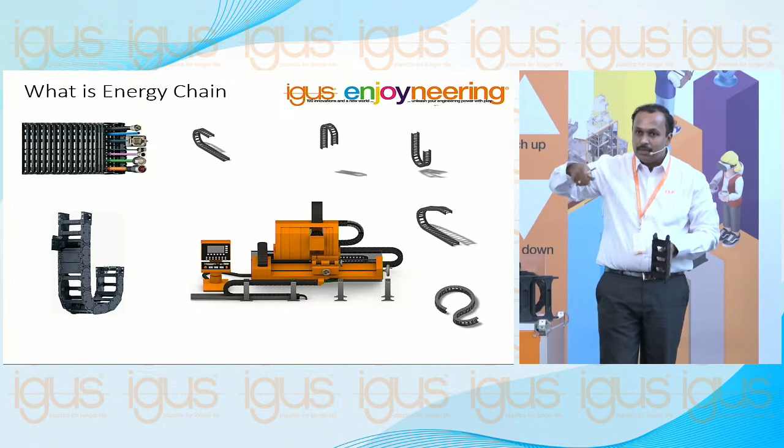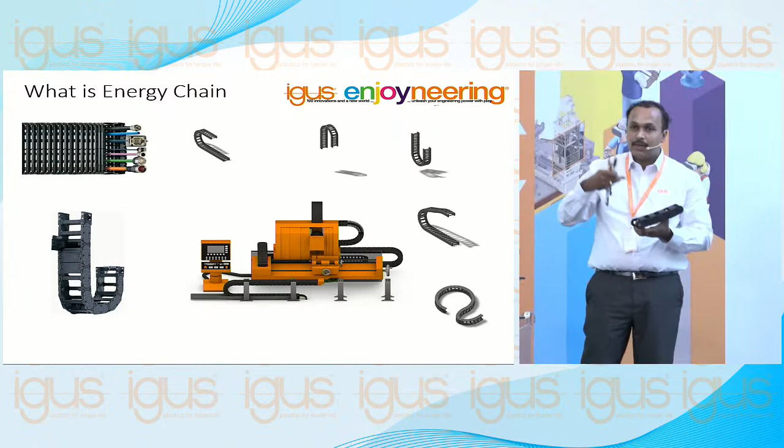Energy chains are also called drag chains. These are used for protection of the cables which pass through the energy chain system. These are the cables which will be inside the machine. As Deepak explained, in cranes the cables hang in a festoon system. We can replace this and use the drag chain system, and the cables will be passed through this, which protects the cables and gives longer life for the cranes, as well as increasing machine durability and performance.

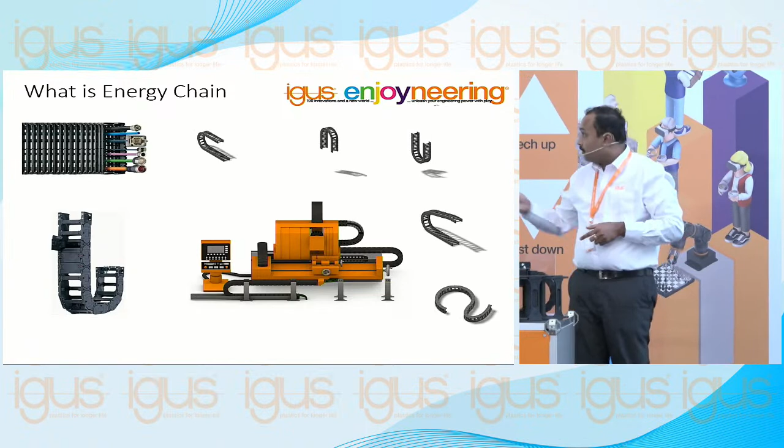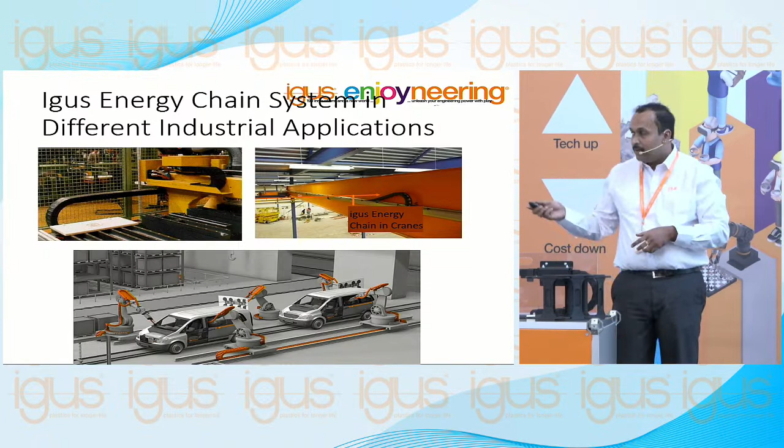And these are the different motions of drag chains, what you can see here. And these are the different industries where the drag chains or energy chains are used: automotive industry, cranes, machine tool industry, woodworking industries, and many more applications.

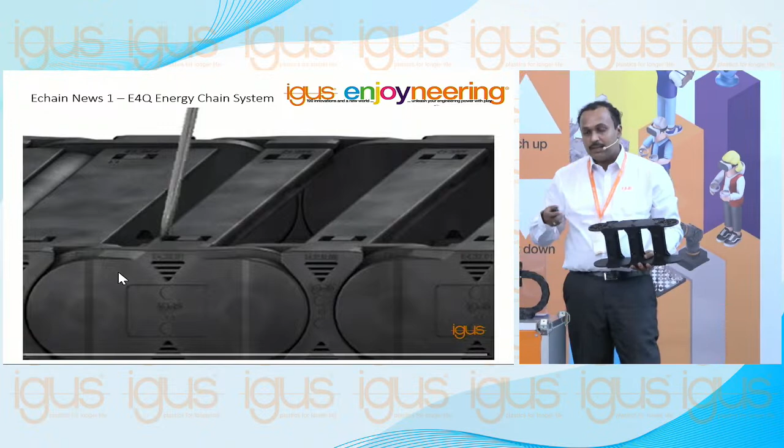Moving on to the news, the first product is the E4Q. We have had this 4-piece concept design for the drag chains for the past 20 years, and we have been modifying and engineering it year on year by improving its performance. In earlier days, we used a screwdriver to open this crossbar, which we call the crossbar, to insert cables inside the drag chains. Now we have made a revolutionary design in this concept to reduce the assembly time for industries and companies where this took a longer time to open the crossbar. This is called the E4Q design.

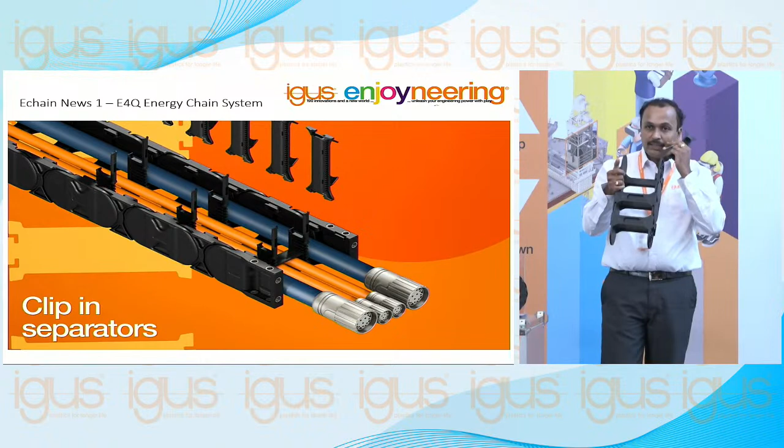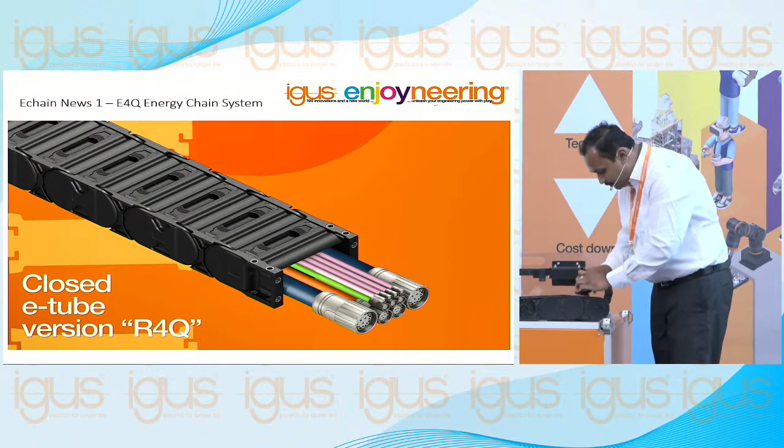In this, you don't need any screwdriver. You can just open this crossbar with your fingers, and it will come out easily. That doesn't mean it doesn't have strength — it's very reliable and has high strength as well. You can insert the cables much faster than using a screwdriver and then locking it back. Once the cables are laid inside, you just put the crossbar back like this, and then lock it. This way, it reduces assembly time, gives more time for factories to work on other things, and improves performance.

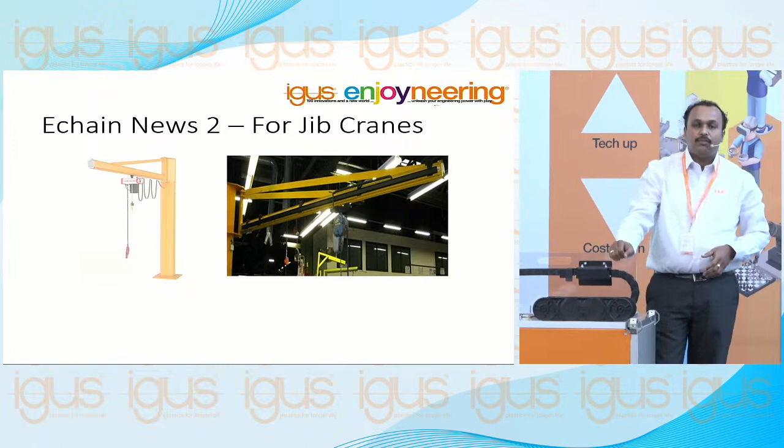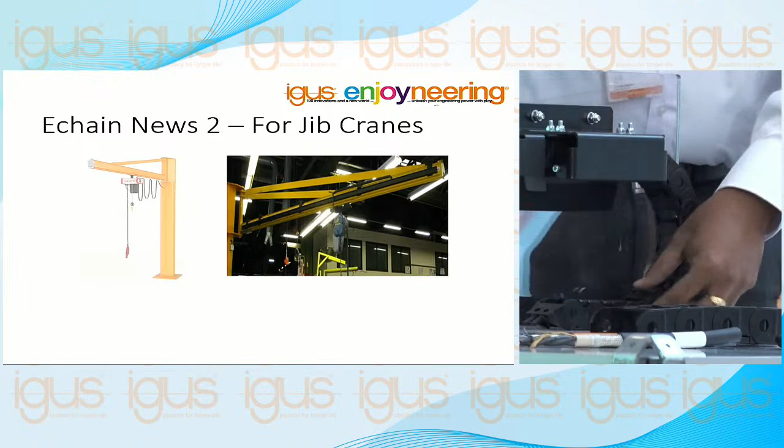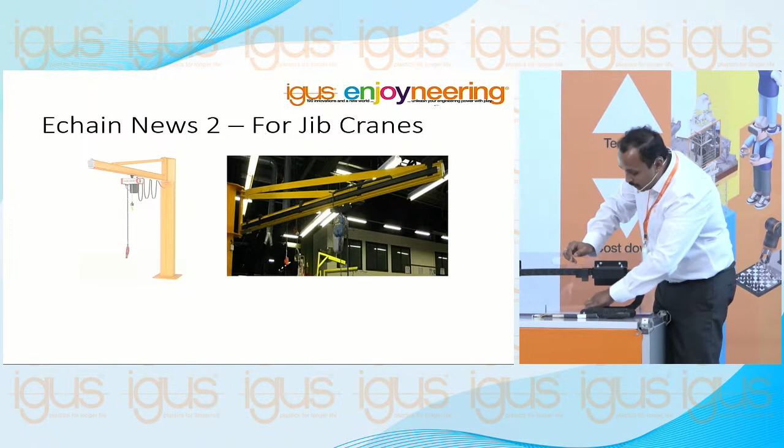Moving on to the next application, as Deepak said, in the crane industry we have been doing well, and we have supplied nearly 14,000 plus drag chain systems to the industry. We have supplied to many cranes like double girder and single girder cranes, and now we've introduced a new solution for jib cranes, which carry smaller loads like 2 ton, 3 ton, in small scale and automotive industries. Earlier, festoon was used for small travel applications. Now we've made a solution supporting the drag chain that can work up to 10-meter travel length without any support. This increases the performance of the jib crane and gives more life for customers at the site.

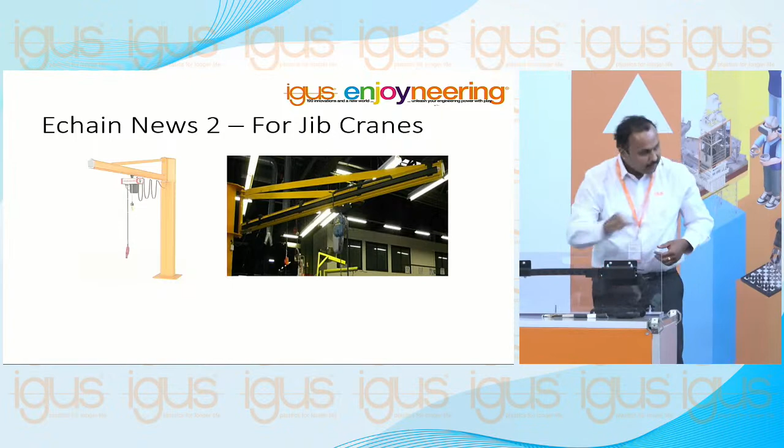Now you saw the energy chains, and they are used very extensively in machines. When we started with energy chains for moving applications, one thing we realized was that the cable is a very important part of this. So we also have high flexible cables that can last really long. I would like to now call upon Ravi Alloli, who is our product manager for cables, to introduce the news for this year.

Thank you, Kaushik, and thank you, Santosh. Hi, everyone. As most of you know, we manufacture cables for moving applications. You may know of wires and cables companies in India like RR, Finolex, or Polycab — those are completely different from our product line. They manufacture cables for static applications, like in hotels, residential, or commercial applications. We manufacture cables only for continuous dynamic applications. We believe in innovation, and every year we come up with new products. This year we have almost 20 plus new products, and I'll be presenting two of them.

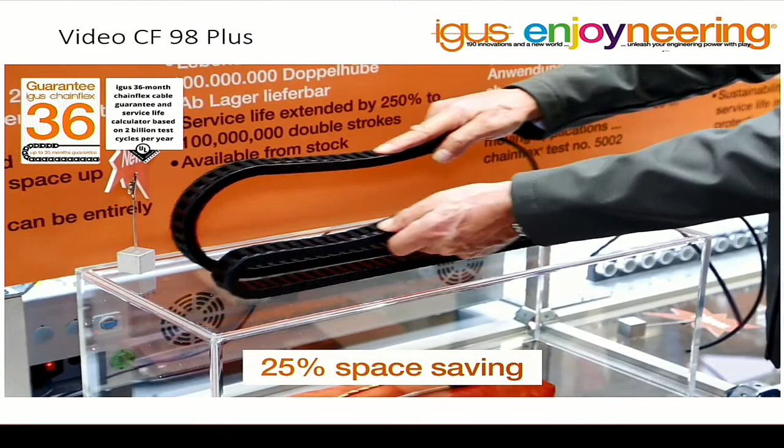This one is brand new and excellent. CF98 plus, with more than 100 million cycles lifetime guaranteed. The second benefit of this product is the small bending radius - we're talking about 3 times D compared to other cable sizes with the same electrical function. All these things are tested and approved, and that's the reason we can guarantee 100 million cycles in a niche application.

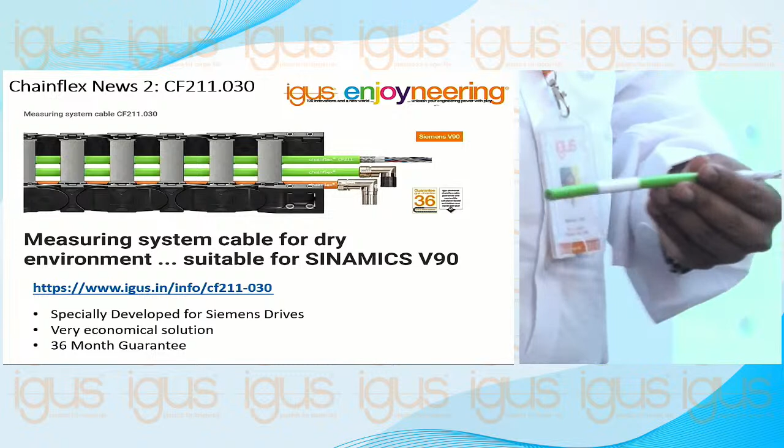The second news, this feedback cable we'll call a signal cable, specially designed for Siemens drive motors for the V90 series. This is with a PVC outer jacket, very high abrasion resistance. It can be used in dry applications, and it has 10 to 20 million life cycles.

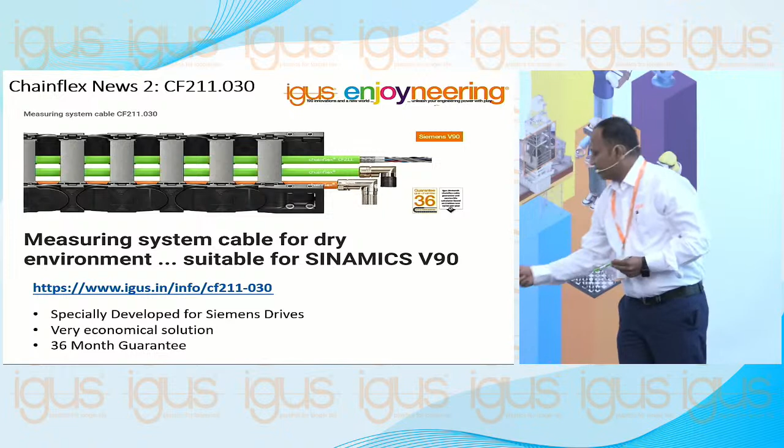You can see where these cables are used. For example, in the newspaper industry like Dainik Bhaskar, we are selling these cables with connectors as a ready cable plug-in system, and getting a lot of orders for Siemens drives and other Germany-make drives. Also, from West Coast paper mill, we have a lot of inquiries and orders, and they are a regular customer where we are supplying.

Apart from that, we are now concentrating more on solar, as it's one of the booming industries, and of course they need a lot of motors, drives and feedback systems. For those applications, we are selling these cables, and also in the medical industries. So these are the two news which I wanted to present. If you have any questions, you can ask me. Thank you. Thanks a lot, Ravi.

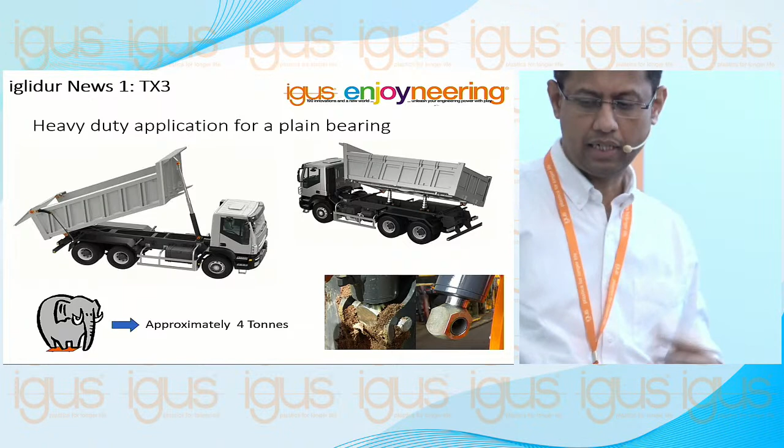So what you see here is a tipper truck. Most of you have already seen it. This tipper truck has a hydraulic cylinder, and this hydraulic cylinder uses an iglidur plain bearing. iglidur plain bearing is a range of products from igus, kind of a bushing, which is a polymer bearing, self-lubricating, does not need any external lubrication, has high wear resistance, and also works in high load conditions. This bearing in my hand can take a load of 16 tons. Just to give you an idea, the average weight of an adult male Indian elephant is 4 tons, so around 4 elephants' weight can be taken by this bearing. But when it comes to even higher loads and cyclic loads, it becomes quite challenging.

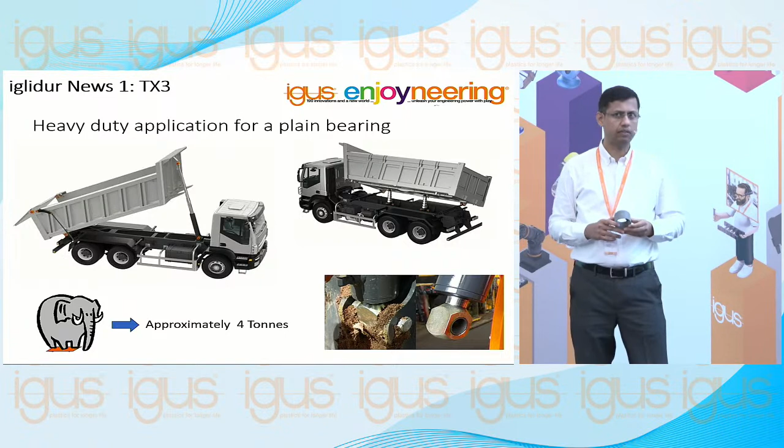For that reason, we have developed a completely new umbrella brand of bearings called Igutex. In Igutex, we have fiber wound compounds, and we already have TX1 and TX2. These are the two materials which we already have. This year, we are coming up with a new material called TX3. TX3 is a high wear resistant material, good for cyclic loads, good for rough and comparatively softer shafts, and dust resistant. Igutex bearings can take loads of up to 200 megapascal. Just to give a comparison, I said 16 tons earlier, but this bearing can take 65 tons of load. So that is the load carrying capacity, and the typical application areas possible with Igutex TX3 are construction machinery, cranes, offshore industry, and agricultural equipment.

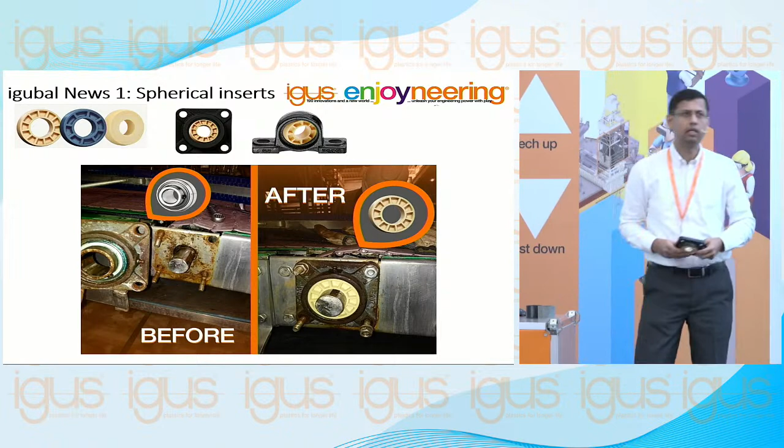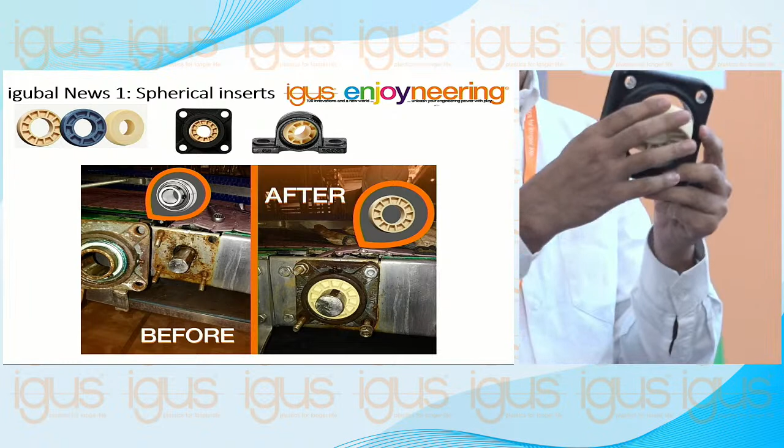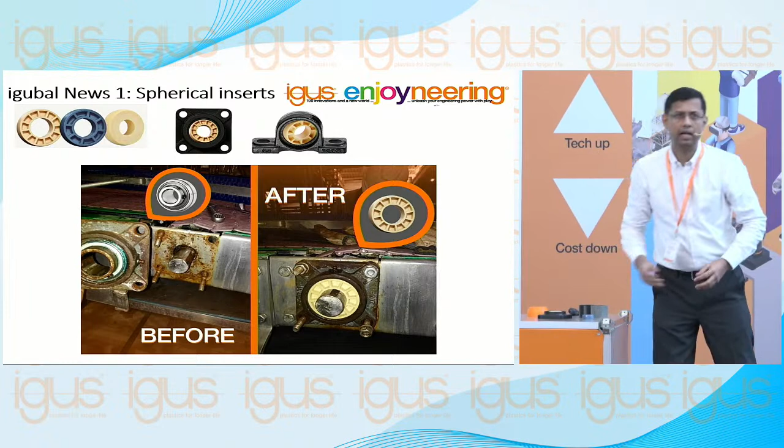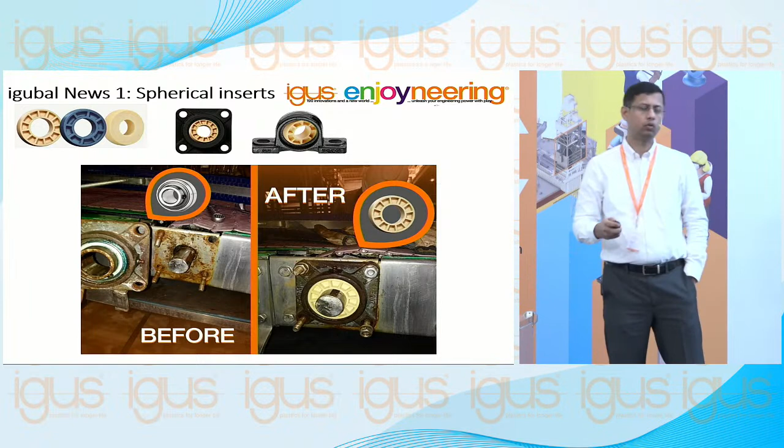Another new product I would like to talk about this year is these spherical bearing inserts, which you see here in my hand. These are 1:1 replaceable spherical bearings. Whenever a customer has, say, a 4-hole flange bearing or a pillow block with worn out and corroded metal bearings, those can be very easily replaced and fixed with these polymer spherical bearings. These spherical bearings are very easy to replace, taking maybe less than 1 minute, and save a lot of time during maintenance operations. They are, again, self-lubricating, corrosion-free, and also possible to be washed. Industries like bottling and beverage are more or less using this type of bearing, but they're also suitable for glass industries and any other industries where conveyors or pillow block bearings could be used.

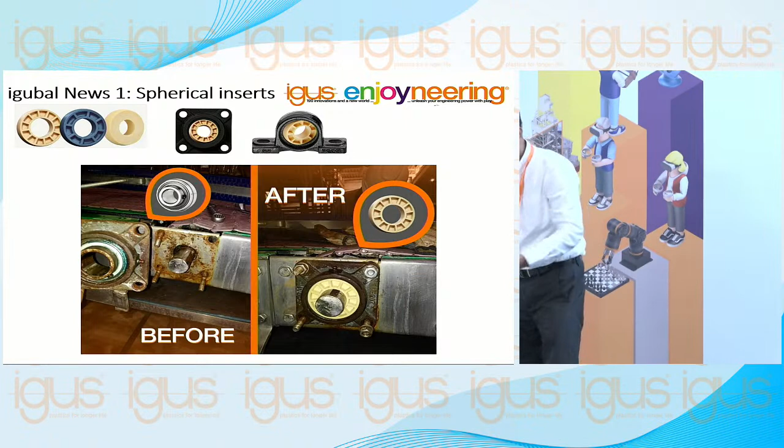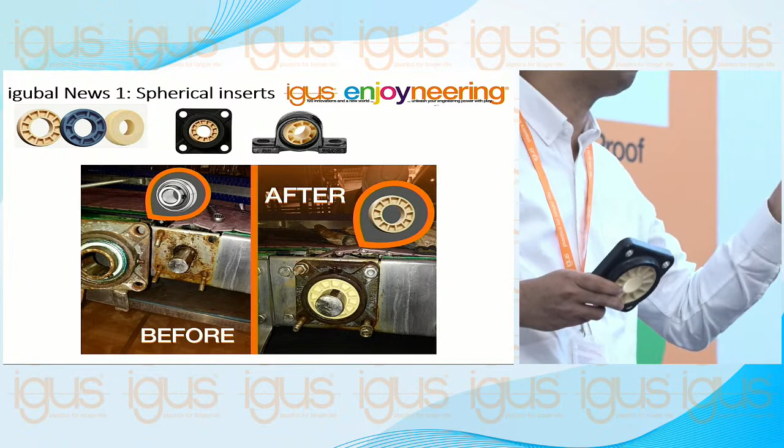You see in the picture, we have replaced a corroded metal bearing with the igubal, and we have it in 3 materials. J and J3 are the two materials which are wear resistant, and for the food industry, we have developed a new material. It's not actually a new material, it's an existing material, but we have developed the spherical bearings in that material. It is FDA compliant material. The name of the material is A350.

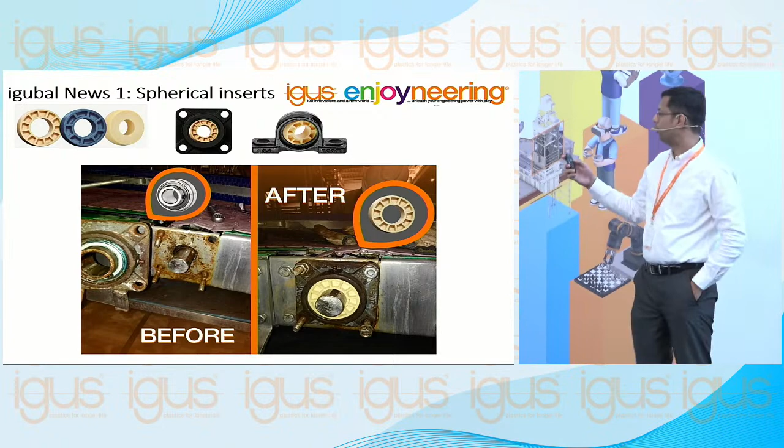I would like to show you a small video to give you a better idea about this product range.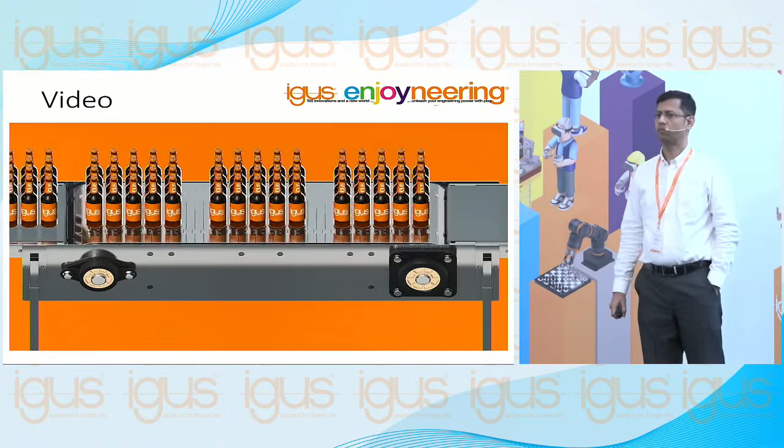Here a conveyor is using a metal bearing, and every time they need to grease it. Now the customer thinks of changing it to an igus ball bearing. This is 100% lubrication free.

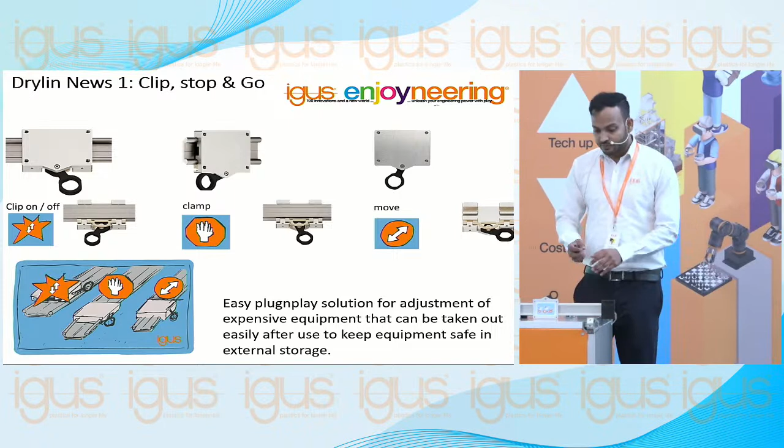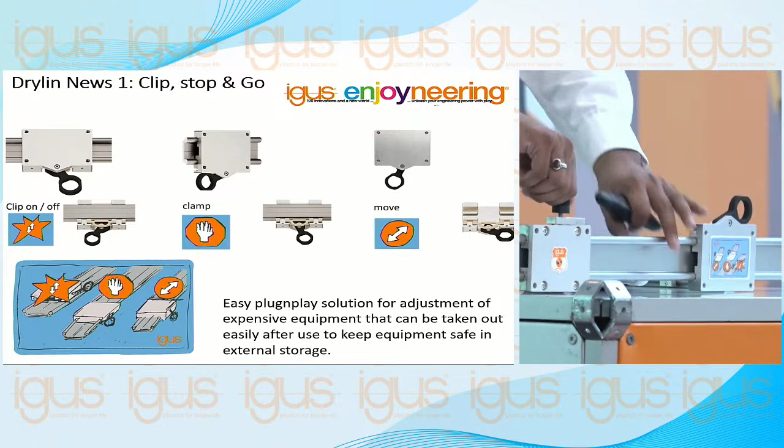Adjustment like this, you can see adjustment and locking. But they had one additional requirement: after use, they wanted to remove this complete assembly and keep it externally. For example, if they're mounting something expensive, they don't want to keep it at floor level, they wanted to store it externally. So we started our discussion with this solution, but the problem is if you want to remove it, you need to disassemble some parts, and this is not very easy. They wanted something easy, a plug and play kind of solution.

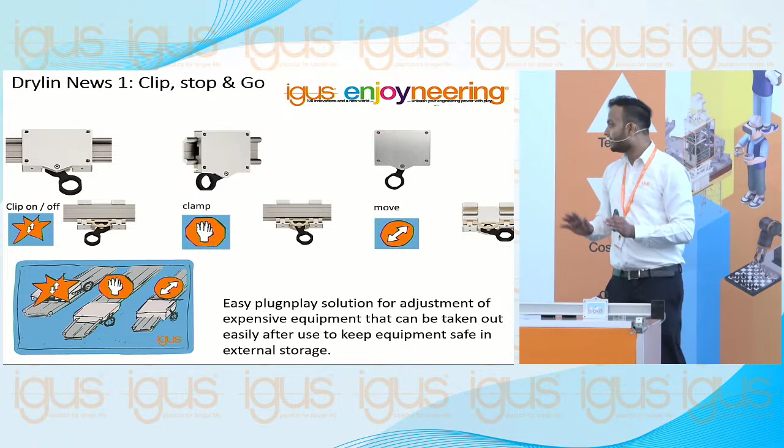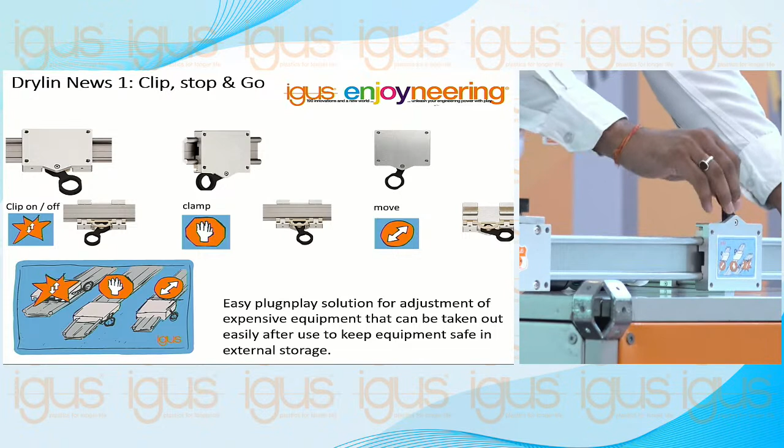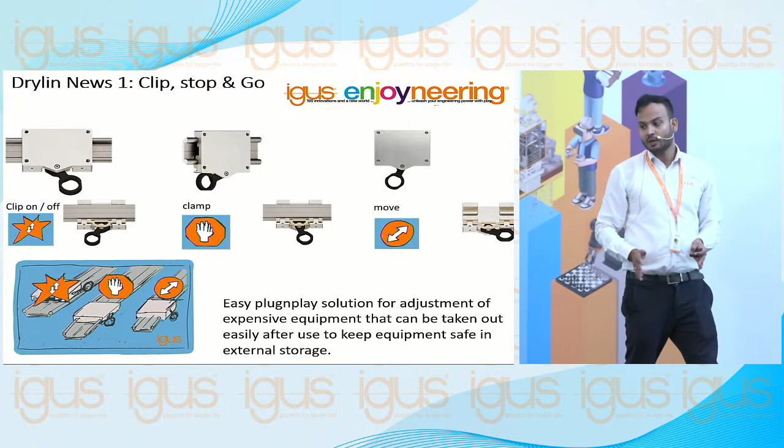Then we came up with a really interesting design. So you can see this - you just need to pull this lever down, you can remove this part, and again you can fix it. You can change the position and lock it. And even if you apply more axial force, it will not change its position. So even if machine vibration is there, more vibration coming, it will not change its position.

So this product is really interesting, for example for camera adjustment. This picture is from our last year's virtual news conference - we were already giving this slide for camera adjustment application, and now we have a better version of it. This product is also interesting for the agriculture industry, LED screen adjustment and all - there too we can push this product.

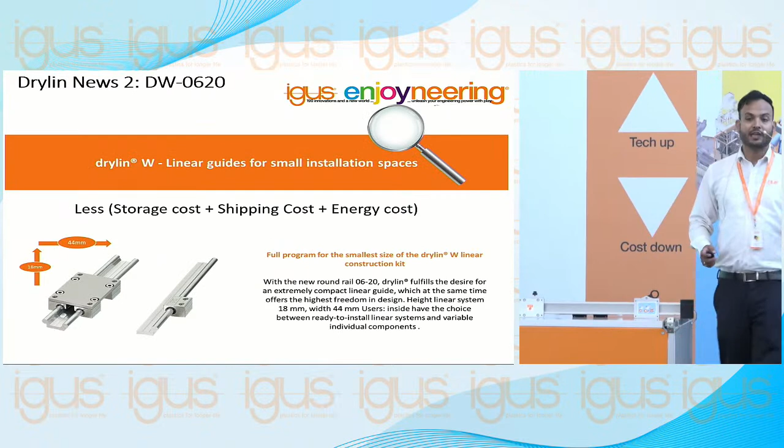Now coming to the second news, and this is very compact - the 0620. Nowadays, industry trend is to do more compact machines. People want to stack it in their pocket, and they don't want to compromise performance even while making compact machines. igus knows the nerves of the industry - every year we come up with more and more compact solutions. My colleague Ravi just now was talking about less bending radius cable systems, so again in the direction of compact solutions.

And this small part - can you guess how much load it can take? It can take 168 kg load. Isn't that interesting? And this product is really interesting for industries like medical, because in medical, people want very compact machines.

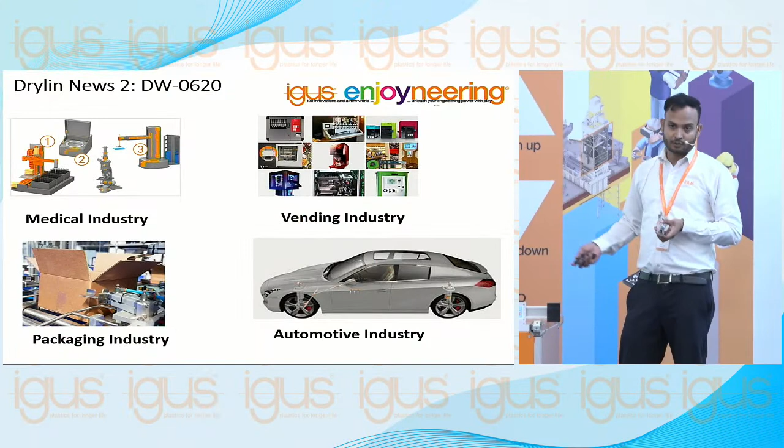This is really interesting for vending machines, mainly especially coffee machines. For coffee machines too we are giving this slide, and now a more compact slide with less installation space will make designers' lives easier. It's definitely interesting for the packaging industry and automotive industry too, because you're always looking for a solution with less weight and compact design - this is definitely helpful for that.

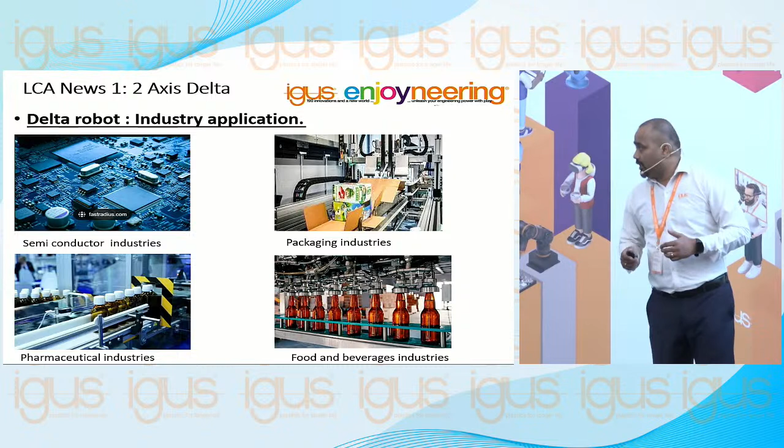And this 2-axis Delta robot - not only 2-axis but also 3-axis - can be useful for semiconductor industries, packaging machines, pharmaceutical machines, and food and beverage industries.

Let us move on to the second news, the Rebel. Rebel is actually a 6-axis cobot because it is very important that robots should work with humans. So our Rebel is already a cobot under the cobot norm TS 15066.

You must be thinking the Rebel robot must be weighing higher, but it is not the case with igus, because igus Rebel is really lightweight. It weighs only 8.2 kgs because of the technology also in Rebel. And if you see the technical parts, it can handle up to 2 kgs of payload. It has a reach of 664 millimeters.

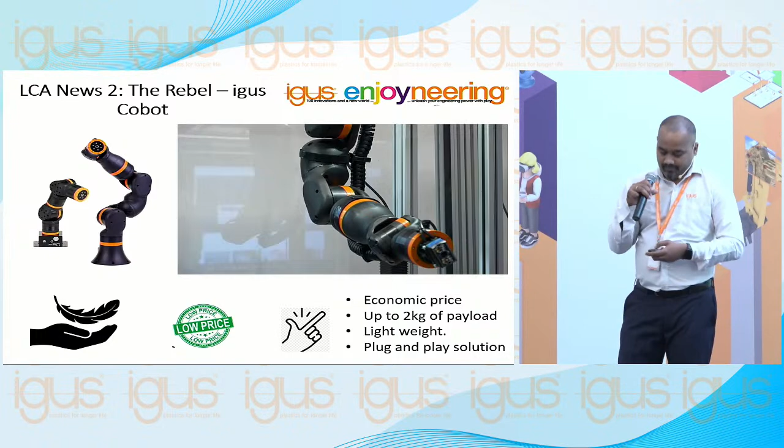So Rebel, I have a short video to play. The Rebel can be used for educational institutions and also serving robot applications and so on. As you can see, it is really lightweight, economically priced, and it is very easy to operate.

Also, I would like to tell you that we have customer testing facilities at igus India, not only in igus India but also in other subsidiaries. This helps us simulate customer applications before they invest, with no need to pay for it. Before they invest, we test the applications, and it helps us too. We call that 'test before invest'.

And also, I would like to announce that we are extending our support to customers via the RBTX online platform. Customers can visit the RBTX platform, choose robotic accessories like grippers, vision systems, machine vision systems, and application references. The important thing is we make sure whatever customers choose via RBTX is 100% compatible with the robots they choose. They can also get the price from the RBTX platform.

So these are the news I wanted to present. Thank you so much. Thank you, Rakesh.

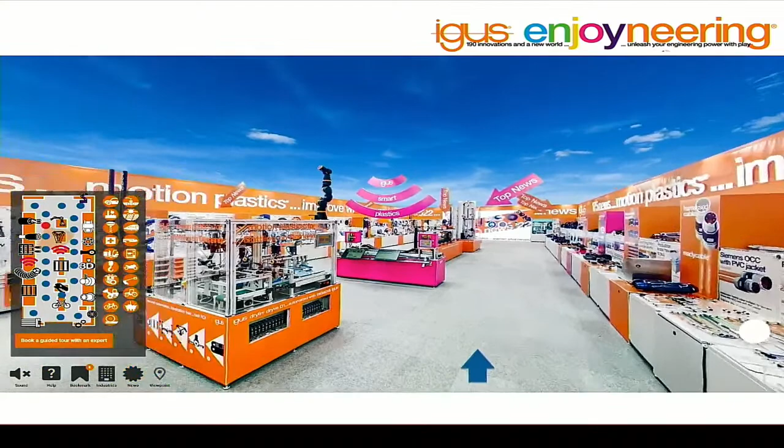Greetings from Cologne. My name is Alexa Heinzelmann, and I am standing here at the igus headquarters in Cologne in our on-location exhibition booth. I am standing at the igus Motion Plastics Show, which is our own exhibition booth on the production facility, presenting the most recent igus innovations. This exhibition booth is the basis for our virtual exhibition, our online exhibition that you can discover yourselves via the internet and look into our product innovations. What's new this year is not only the products, but that we are showing specific rooms for industry, specific innovation areas for our industries. We have 19 different industries where we have igus news that we are presenting for you on our virtual exhibition. Have a wonderful event, thank you for visiting igus and being with us, and best greetings from Cologne. Bye-bye.